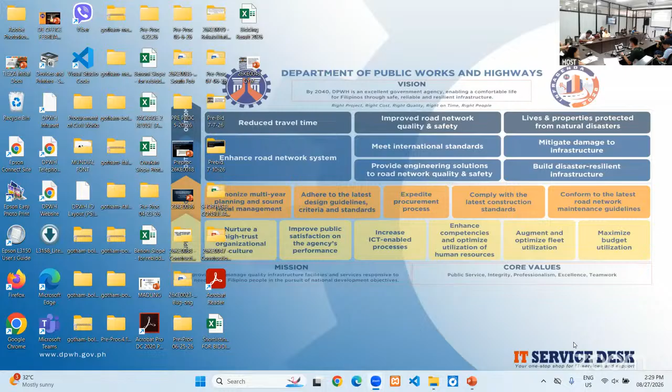Good afternoon, everyone. Good afternoon, Madam Chair. I would like to discuss the project with project title Widening of Permanent Bridges, Timayog Bridge 1, B00021CG, along Camiguin Circumferential Road, with bridge station limits of kilometer 44 plus 726 to kilometer 44 plus 777.5, with an appropriation of 54,987,000 and an approved budget cost of 53,062,284.89 under fund source GAA 2026, with bridge length of 51.5 linear meters, with area of 491.31 square meters. The total project duration for this project is 240 calendar days.

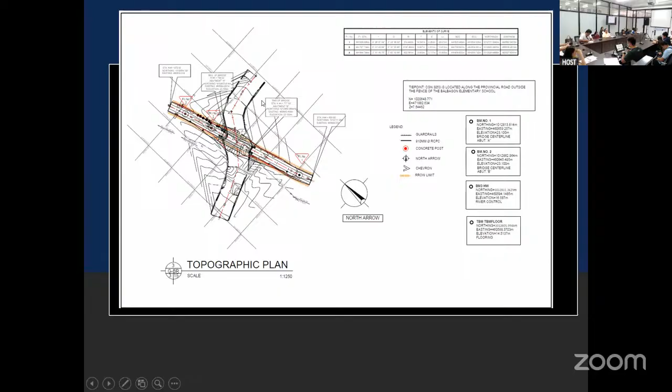Showing us the topographic plan. And the foundation plan, there is a pier at the middle. We have 5 meters by 4 meters with 12 H piles, and a 3 by 4 footing of the abutments.

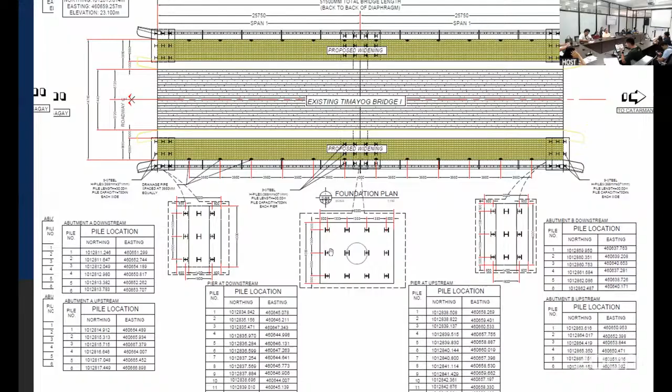And now showing is the sidewalk and the railings plan.

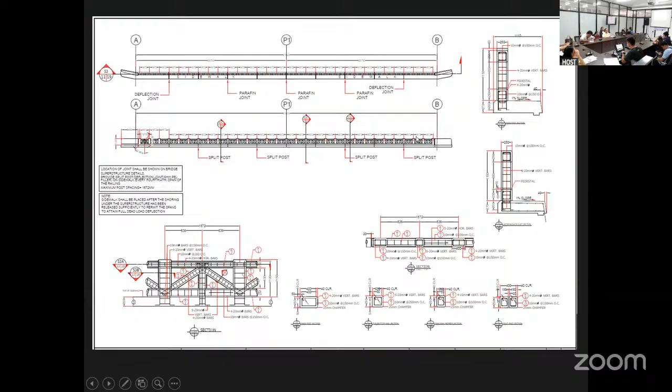For the summary of quantities: construction of field office for an engineer, 1 lump sum. Project billboard signboard, 4 each. Occupational safety and health program, 8 months. Traffic management, 1 lump sum. Mobilization and demobilization, 1 lump sum. Craneway, 1 lump sum. Removal of structures and obstruction, concrete, 91.92 cubic meters.

Bridge structure excavation, common soil, 580.74 cubic meters. Embankment from roadway structure excavation, common soil, 163.2 cubic meters.

Steel H piles furnished, 360.7 millimeters by 378.5 millimeters, 174.2 kilograms per meter, 1,710 meters. Steel H piles driven, 1,515 meters. Test piles furnished, 90 meters. Test pile driven, 87 meters.

Concrete railing standard, 103 meters. Reinforcing steel, grade 40, 4,599.562 kilograms. For grade 60, 99,473.836 kilograms. For structural concrete, 20.68 MPa, Class A, 28 days,

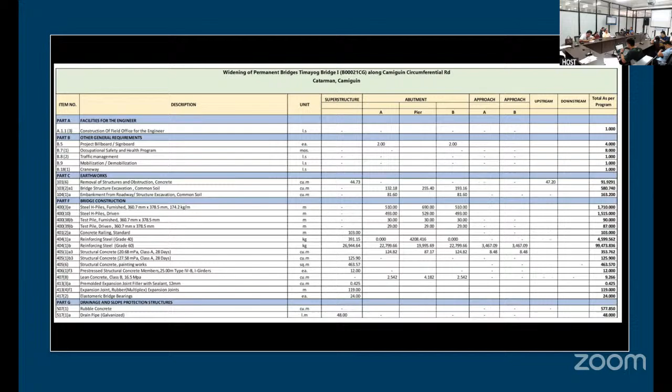For the minimum equipment requirement for the project: 1 backhoe with breaker, 2 jackhammers, 1 air compressor, 2 dump trucks, 1 payloader, 1 truck-mounted crane, 1 cutting outfit, 1 bulldozer, 1 motorized road grader, 2 vibratory rollers, 1 water truck or pump, 2 concrete vibrators, 1 plate compactor, 1 bar bender 32mm three-phase, 1 bar cutter 32mm single-phase.

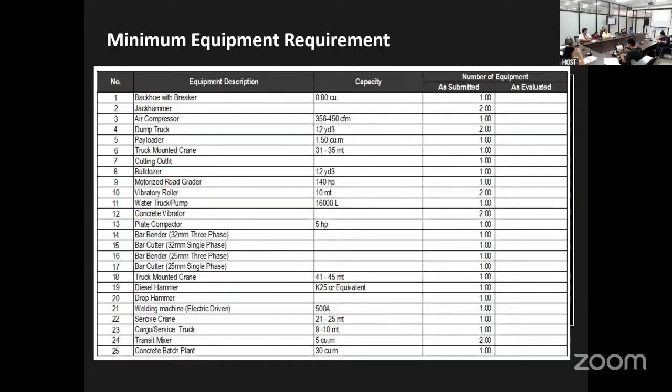1 bar bender 25mm three-phase, 1 bar cutter 25mm single-phase, 1 truck-mounted crane, 1 diesel hammer, 1 drop hammer, 1 welding machine electric-driven, 1 service crane, 1 cargo service truck, 1 crawler crane with bucket, 1 bagger mixer, 1 backhoe, 1 generator set, 1 concrete saw, 1 barricade flasher light, and 1 two-way radio.

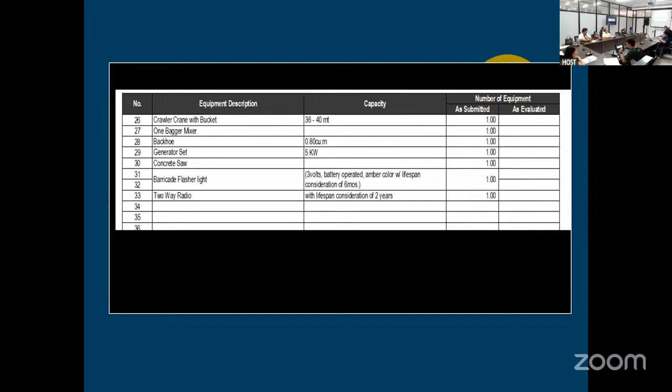For item 101(6), removal of structure and obstruction, concrete - these activities include the removal of existing post, railings, sidewalk, wing wall, and river control.

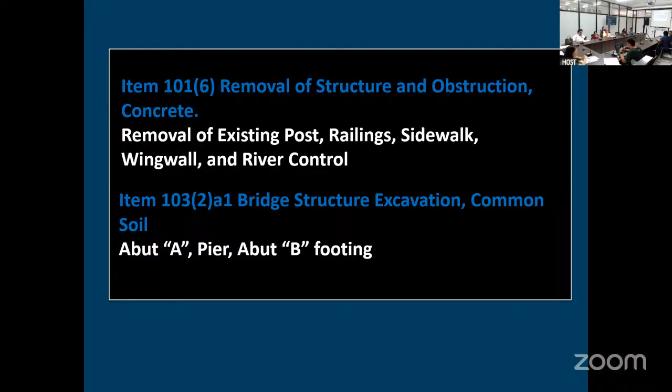For 103-2A1, bridge structure excavation common soil is for abutment A, pier, and abutment B footing. For 104-1A, embankment from roadway structure excavation common soil is for the approach slab.

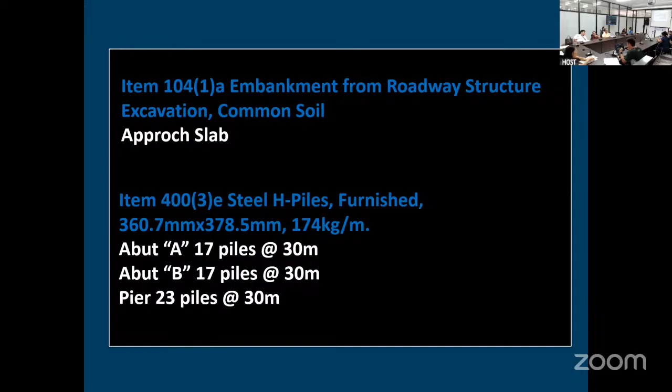For item 400(3)e, steel H piles furnished: abutment A, 17 piles at 30 meters; abutment B, 17 piles at 30 meters; pier, 23 piles at 30 meters. For item 400(10), steel H piles driven: abutments A and B, 29 meters; pier, 23 meters.

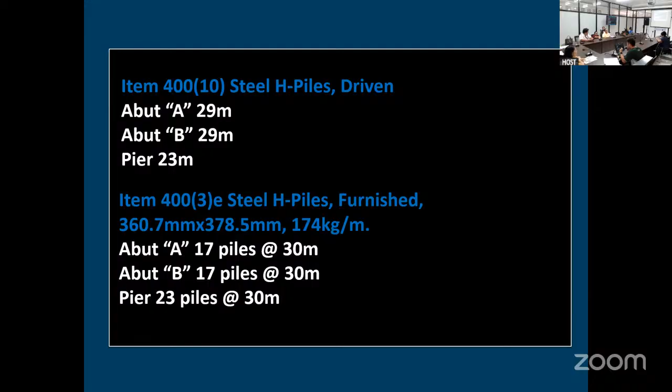For 400(3)e, steel H piles furnished: abutment A and B, all 17 piles at 30 meters. For pier, 23 piles at 30 meters.

For item 400(3)e, H-piles furnished: abutment A and B, 1 at 30 meters; pier, 1 at 30 meters. For reinforcing steel grade 40, rebar 12mm diameter and below.

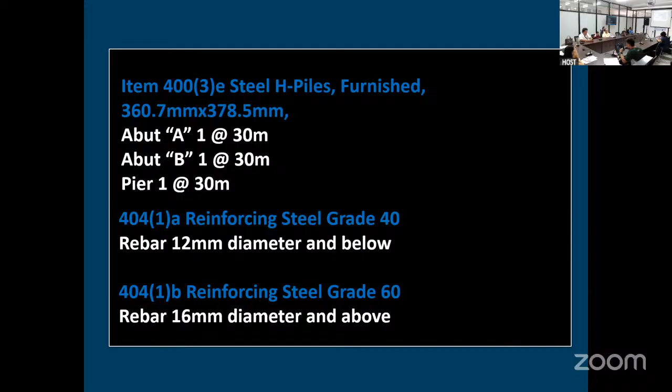For steel grade 60, rebar 16mm diameter and above. For structural concrete, 20.68 megapascals: for substructure, the approach railings, sidewalk, wing wall, back wall, corbel, and footing; for pier, coping, column, shear block, footing, and also the approach slab.

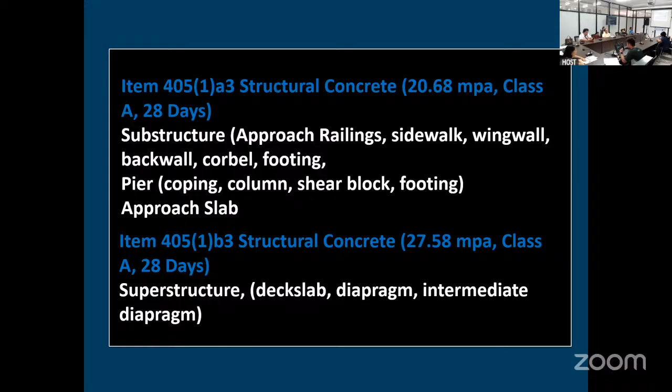For structural concrete, 27.58 megapascals, Class A, 28 days, for superstructures: deck slab, diaphragm, intermediate diaphragm. For structural concrete painting works: railings, post, parapets, and sidewalks. For lean concrete, Class B, 16.5 megapascals: abutment A, abutment B, and pier.

That would be all for this project, Madam Chair.

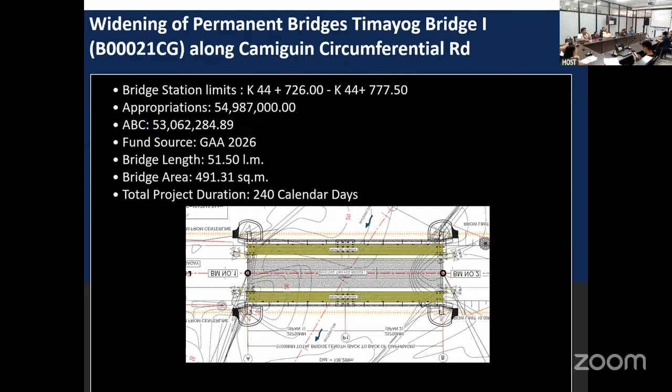Let's proceed to another project. 26 KE 0043 rebidding, construction completion of multipurpose building, Camiguin Gymnasium, Barangay Balbagon, Municipality of Mambajao, Province of Camiguin.

With coordinates of 124.72948833 degrees and 9.248833666 degrees. Do we have minutes for the last pre-bid, pre-proc?

Yes, Madam Chair. For the minutes, during the discussions, an important discussion is to be conducted with the head of the procuring entity to address and resolve the issues encountered in the project currently under procurement. The discussion focused on clarifying the outstanding concerns, identifying appropriate courses of action, and ensuring compliance with applicable procurement rules and procedures. The HOPE, along with the OIC ADE, shall provide guidance on the necessary steps to address the identified issues and facilitate the timely completion of the procurement process.

So that's all. Proceed to the presentation.

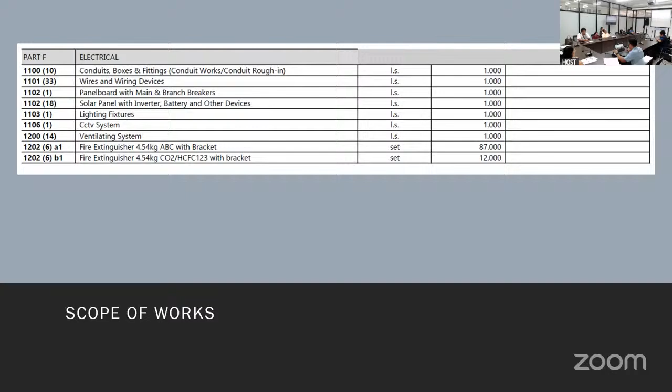Solar panel with inverter, battery, and other devices, 1 lump sum. Lighting fixtures, 1 lump sum. CCTV system, 1 lump sum. Ventilating system, 1 lump sum. Fire extinguisher, 4.54 kilogram ABC with bracket, 87 sets. Fire extinguisher, 4.54 kilogram CO2 or HCFC 123 with bracket, 12 sets.

So, this covers the provision of furniture, fixtures, equipment, appliance for the field engineer. We have, sana, laptop computer. What are the specs for it?

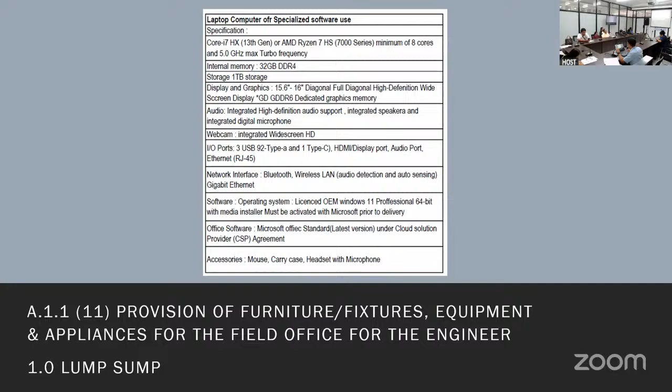So for the ventilating system, this is included: exhaust fan 36 inches, 4 sets. Motorized intake louvers, 8 sets. Generator set exhaust silencer, as shown on the screen, 1 set silencer for 1500 kVA and 1 set for 600 kVA.

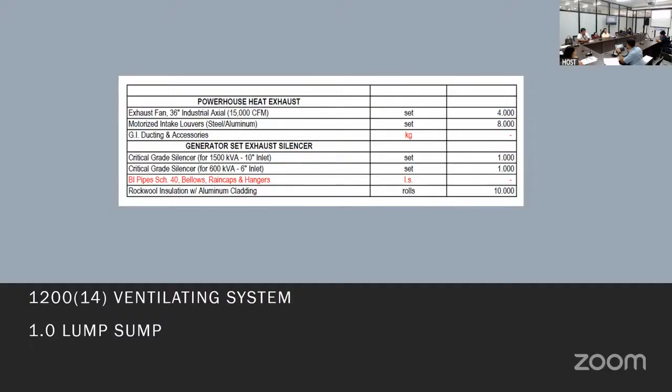So the softscape: ornamental trees, 280 each. Shrubs, 840 each. Ornamental grass, 2,400 square meters. For the hardscape, 4-seater sofa, 4 sets.

Hardwood countertop, 2 sets. 450 mm height center table, 2 sets, station table with office chair and modular cabinet for VIP lounge, 1 set, additional bleachers, 300 sets, and 1.2 by 1.2 modular stage panel, 115 sets, 900 mm width access stairs, 8 sets, stage brace, 258 sets, stage stand, 144 sets, adjustable base, 250 mm, 144 sets.

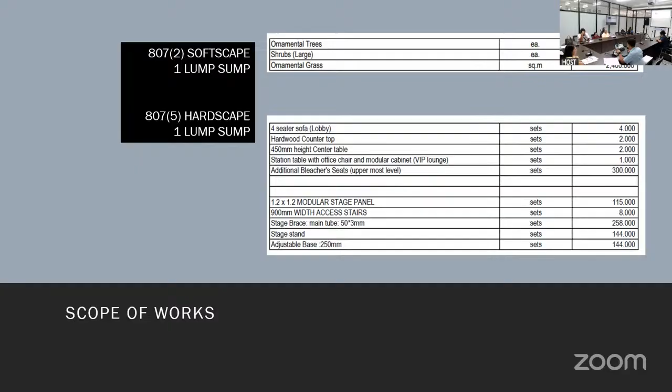So for the solar panel, we have 450 watts monocrystalline solar panel, 6 pieces, and 3 kilowatt hybrid off-grid inverter, 3 units. For the battery, 200 AH 12 volts lithium ion deep cycle battery, 3 pieces, solar aluminum mounting rail kit, 3 sets, wire 6 mm square PV cable, red and black, 100 meters, MC4 connectors, 1 lot, 14 square mm THHN, THWN2 for grounding, 1 roll.

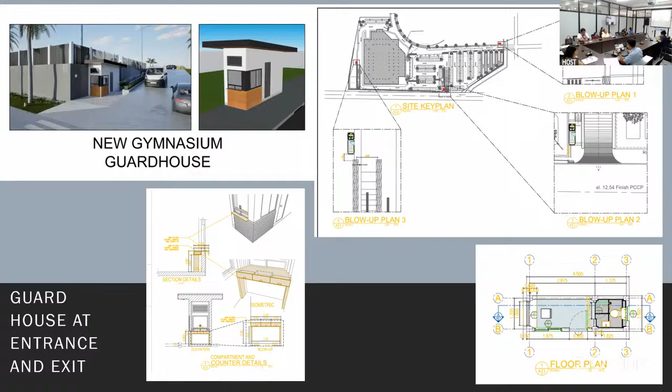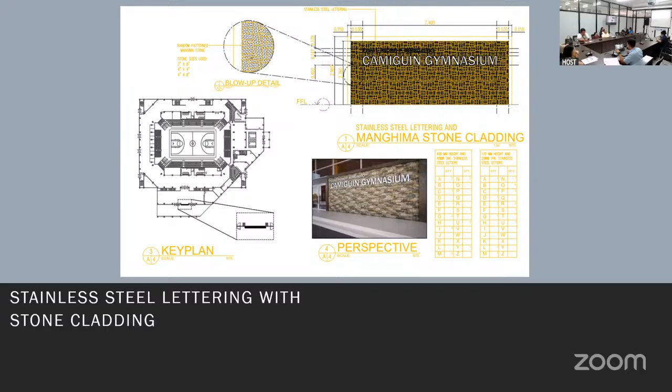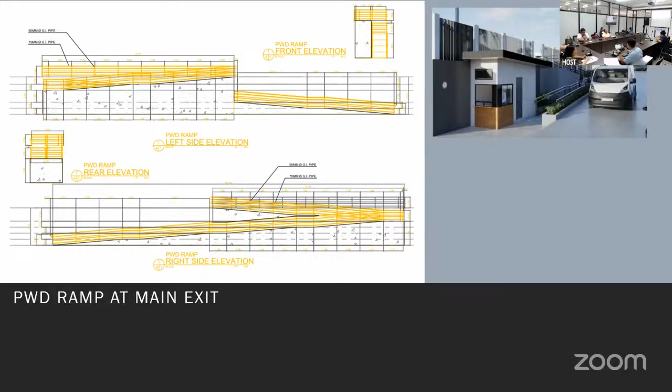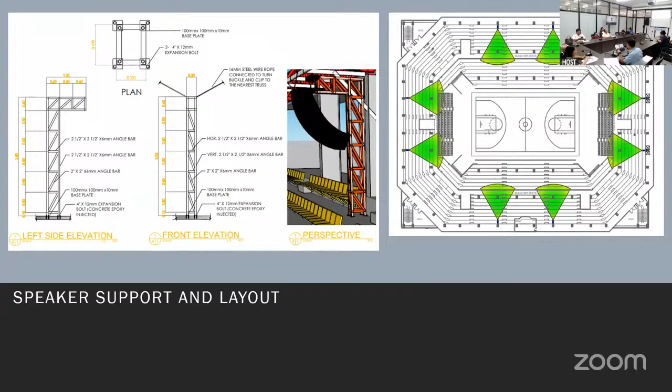So for the plan: guardhouse at entrance and exit, doors, additional bleachers at 3rd floor, stainless steel lettering with stone cladding, saloon, VIP lounge, powerhouse, exhaust duct layout, ceiling cladding detail, motorcycle parking area, PWD ramp at main exit, line canal, glass frame support, speaker support and layout, main entrance detail, waterproofing layout, modular stage. And that's all.